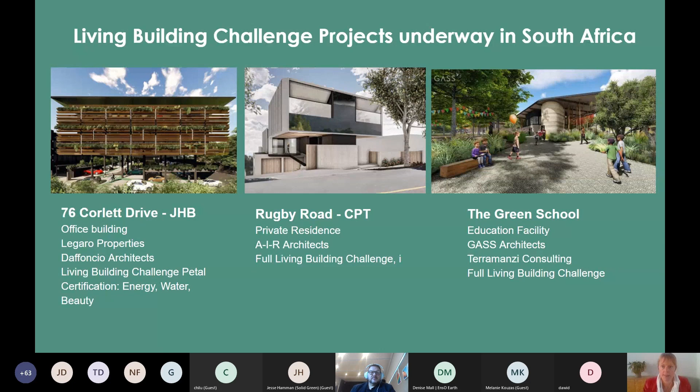Super exciting. As for the presenters: Denise is not going to present herself - I'm going to show you a video because she's got very bad internet connection where she is. That presentation is about net positive water and the projects we worked on with her. Chilu is then going to talk about net positive energy, and we'll get Fabio to talk about the school I just showed you. Lastly, Jesse will talk about materials and the materials petal. I'm going to hand over to Denise.

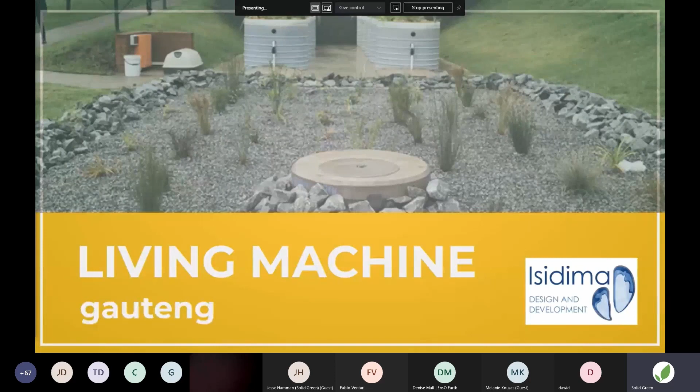Johnny, from Isidima, is the lead wet services consultant for the Corlett project. EnsO Earth tagged along, as we had been working together on the Living Machine project, and it seemed the natural next step to do the living building together.

However, transitioning an off-grid building into a municipal region brought an entirely new set of challenges. Municipal bylaws needed to be met in a way that would satisfy both council and the certification process for the Living Future Institute. True off-grid buildings are not permitted within a municipal region - all stands are required to have a potable water and wastewater connection, and a stormwater attenuation solution. As a direct result of Day Zero in Cape Town, the bylaws have been influenced, resulting in some grey area around harvesting rainwater and upcycling wastewater.

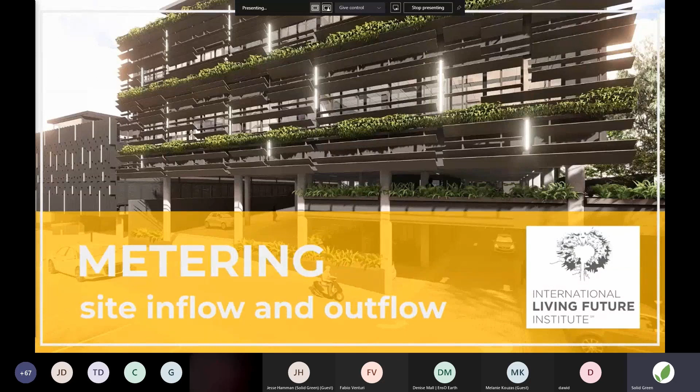ILFI, however, have restrictions that need to be met under these circumstances. The most important was a metering system on the inflow and outflow on the property, to record any incidents where the closed-loop design was infringed upon. But beyond that, it was a very standard closed-loop design, until COVID hit us, and everything changed.

Legaro made a strategic decision to pivot the building's functionality away from an office building towards medical suites. This was in response to the sudden drop in demand for office space due to remote working, and the increase in demand for medical facilities.

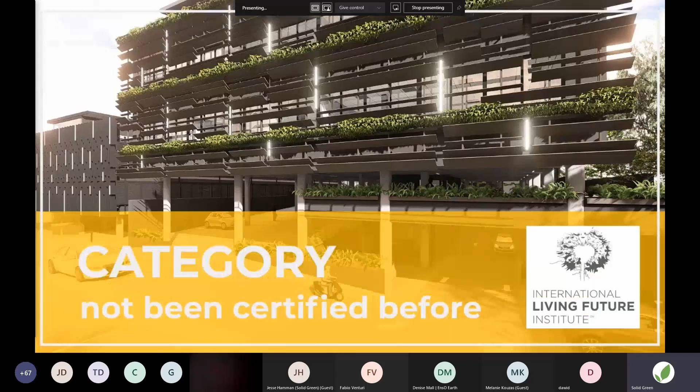Unbeknown to any of us, what this decision did was catapult them into further uncharted water, as the ILFI had never certified a building in this category for net positive water. Of the 600 globally certified buildings at the time, only 50 had been net positive water certified. Where we started with the first commercial building in Africa seeking net positive water certification, we were now designing the first medical facility in the world to seek certification for net positive water.

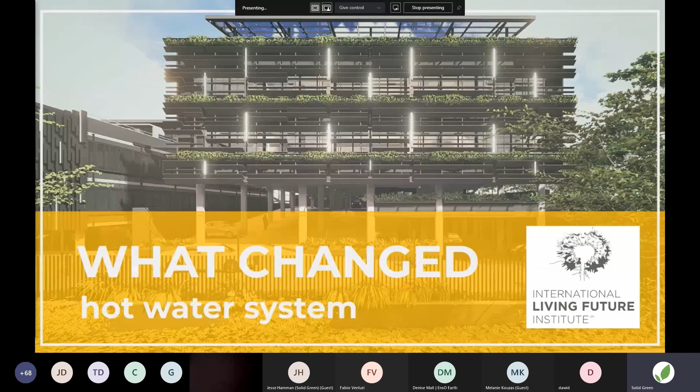What fundamentally changed was the pathway for certification relating to the hot water system. In conventional office buildings, the hot water was a secondary service, dealt with as part of the cold water system, with on-demand heating via a heat pump, or similar approved. In the medical facility, the hot water supply became the primary service, and needed to be available 24/7. Furthermore, we also needed to retain the minimum chlorine levels in the hot water system for health reasons, which in the conventional office facility were extracted from the cold water system at point of use. These were the two criteria that resulted in the formulation of the new pathway and building category.

The ILFI was supportive and held our hand through the process, and credit to their commitment to find the certification process that suits the client's needs as well.

The big question is always what is net zero and what is net positive. The difference is what allows us to move beyond sustainable to regenerative. Net zero occurs when the water consumed is the same as the amount of water that is recycled. And net positive is when the water recycled is greater than the water consumed. In this particular case, we are recycling 60 to 70% of the water on the site.

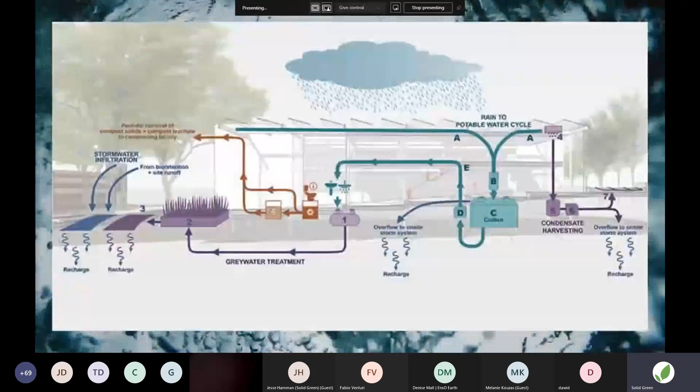So in summary, a net positive water strategy delivers an off-grid, ecologically balanced design that mimics a natural system while addressing water harvesting, wastewater treatment, and stormwater management, without disrupting the natural water cycle of the site.

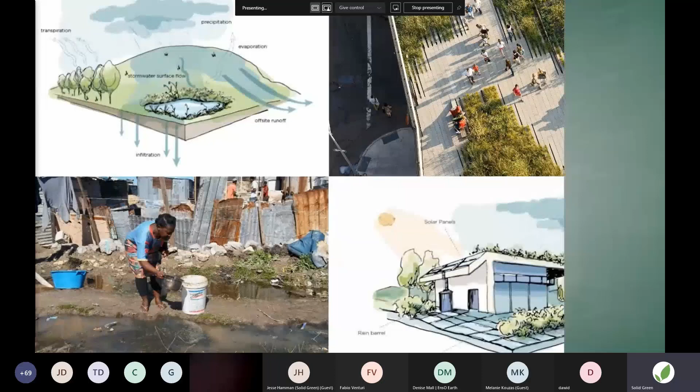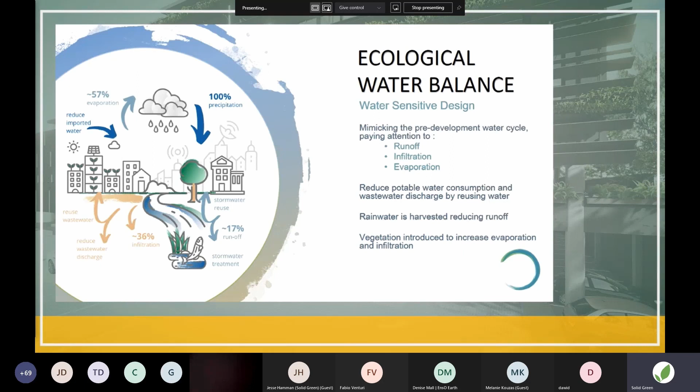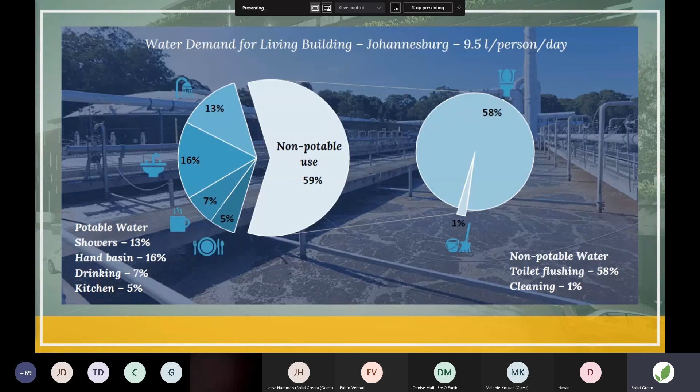So how do we create an ecological water balance? First, we have to aim for the targets that have been set by the pre-development conditions, paying attention to runoff, infiltration and evaporation. Only by rationalizing the water demand as fit for purpose can we create an optimal water balance for a project. We then look at the wastewater system to reuse, reclaim and recycle as much as possible, in order to avoid the double-dipping cost of using potable water for toilet flushing. And lastly, we look at stormwater management, but this is integrated with rainwater harvesting for potable use.

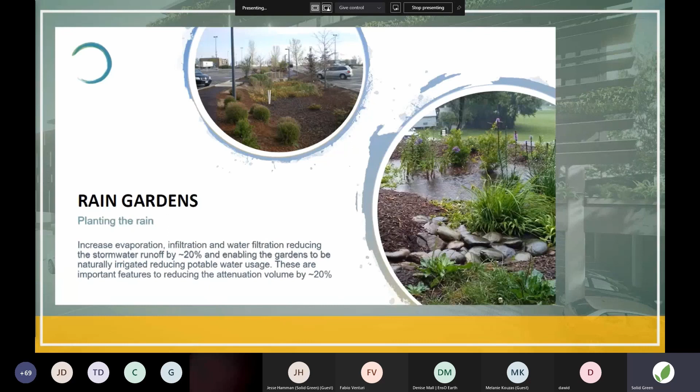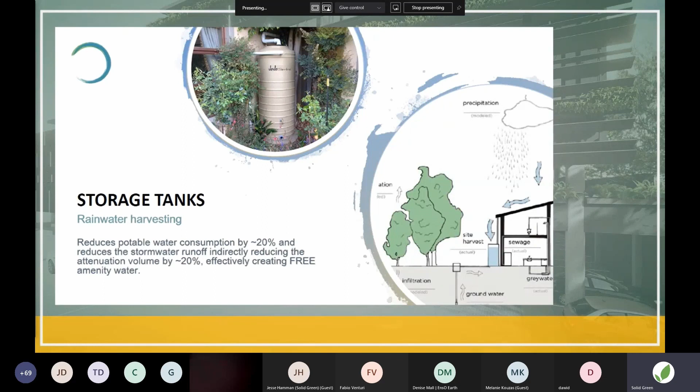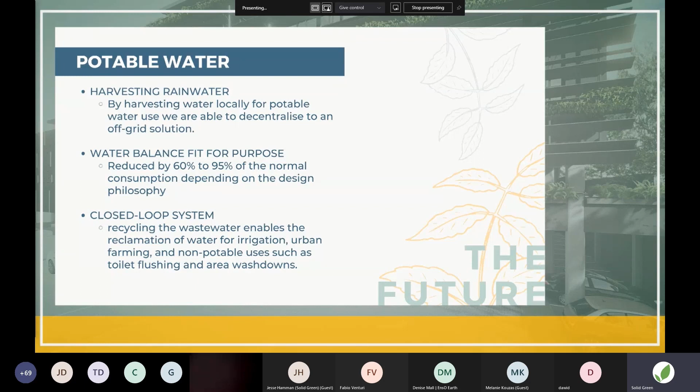Rainwater is one of our purest forms of potable water, requiring the least amount of effort to purify, and is not allowed to be used for toilet flushing in the living building. It should be used exclusively for potable water. It is by harvesting water locally for potable water use that we are able to decentralize to an off-grid solution, which is really the solution that economic water-scarce Africa really needs. The potable water demand can be reduced by 60% to 95% of the normal consumption depending on the design philosophy, with water usage further reduced by incorporating water-efficient devices such as composting toilets, waterless urinals, and hand basin sprayers.

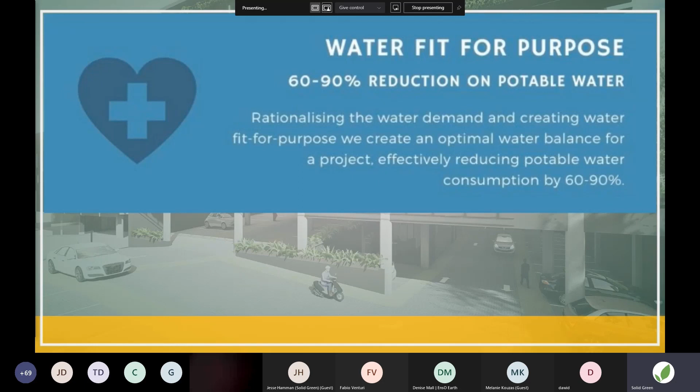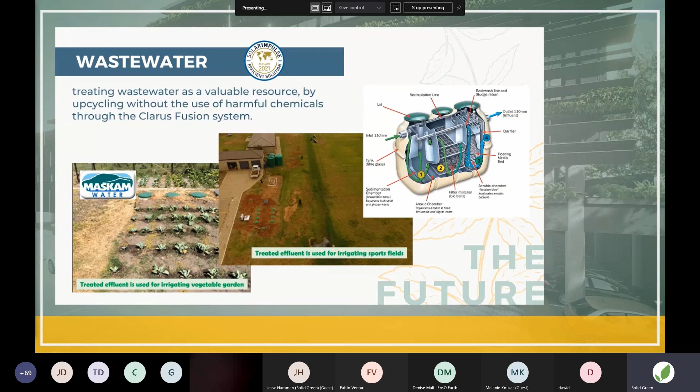Then we look at the wastewater system. We need to change our lens here and see wastewater as a valuable resource. By upcycling the nutrient-rich wastewater, we are able to use the reclaimed water for irrigation and urban farming, as well as for non-potable uses such as toilet flushing and area washdowns. A biotreatment system is really the heartbeat of the wastewater reclamation system, as it mimics nature's purification process without the use of harmful chemicals.

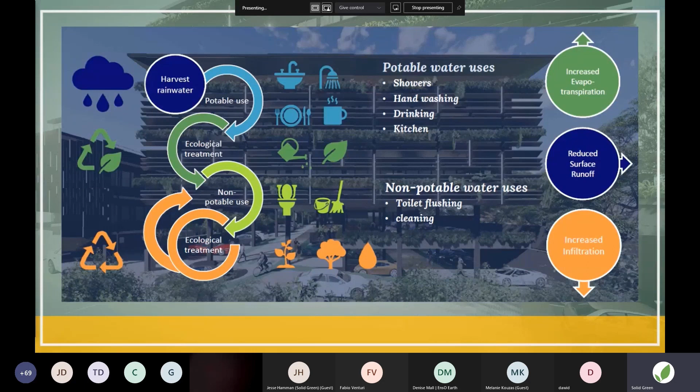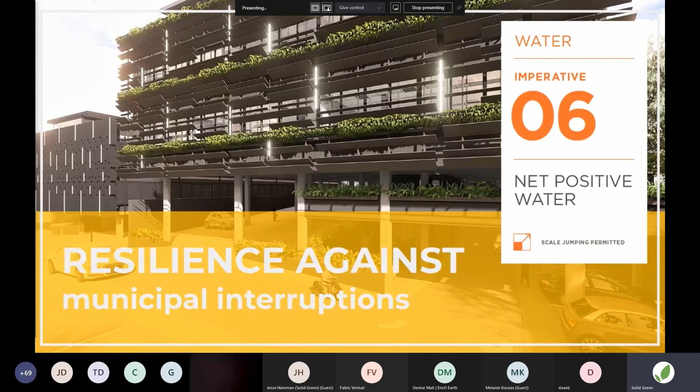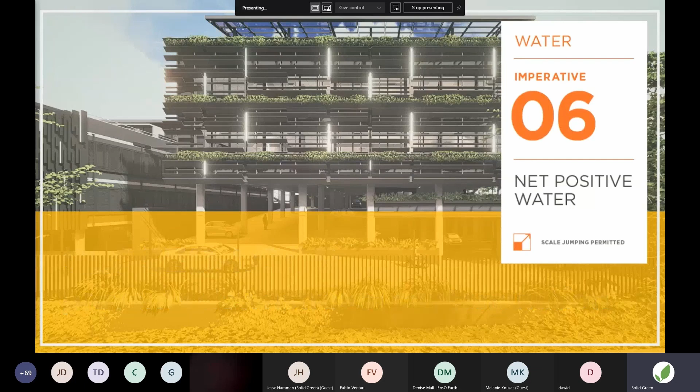What is the value add from adopting net positive water strategies? It improves the resilience of development against municipal supply interruptions, which indirectly will contribute to higher productivity rates for tenants. It relieves the stress on municipal services, indirectly increasing the capacity of the municipal system while also reducing local and catchment flooding risk. We enable a positive environmental impact by restoring the natural hydrological conditions. Harvested rainwater is free from micropollutants and pharmaceutical products commonly found in municipal water harvested from surface water. And by adopting a closed-loop wastewater reclamation system, we also prevent all of the above from entering and contaminating our water resources. The design we implemented also incorporated the option for seamless municipal backup, further increasing resilience of the system.

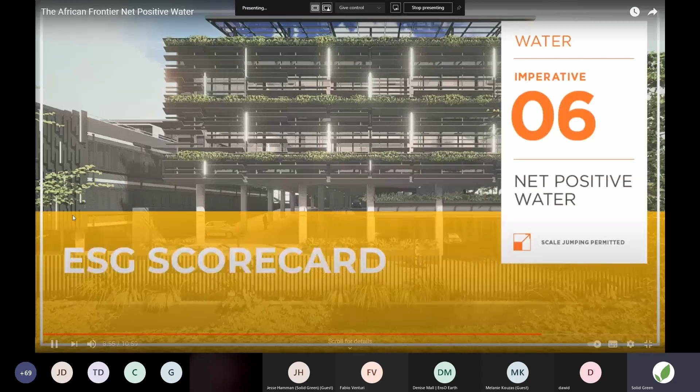The time of being able to ignore your corporate social responsibilities are over. As we move forward out of the global impact of COVID, we are seeing the impact of ESG on companies' investment value. It is now more relevant than ever before.

We are currently refining the business case as more accurate costings emerge as we move forward into the construction phase.

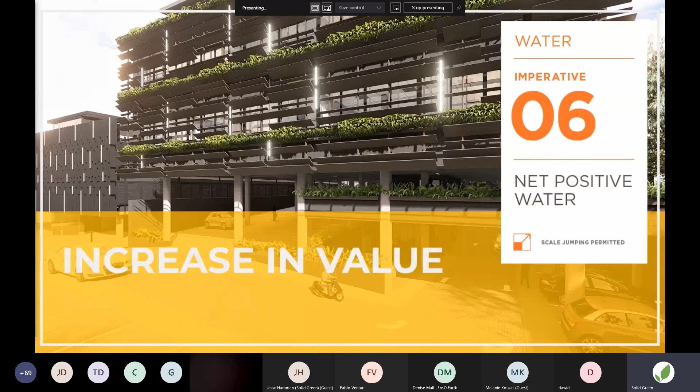Some key assumptions are that net positive water will result in higher rental and occupancy rates, especially as water scarcity becomes the new load shedding in South Africa. Accredited developments will increase in value at higher rates than the market average, with conventional buildings currently performing at 7% and their green counterparts at 10%.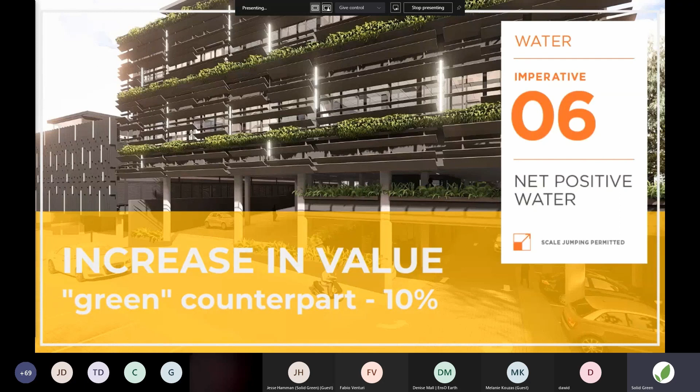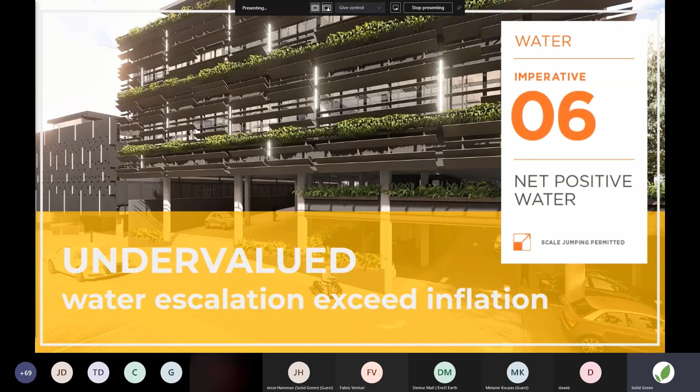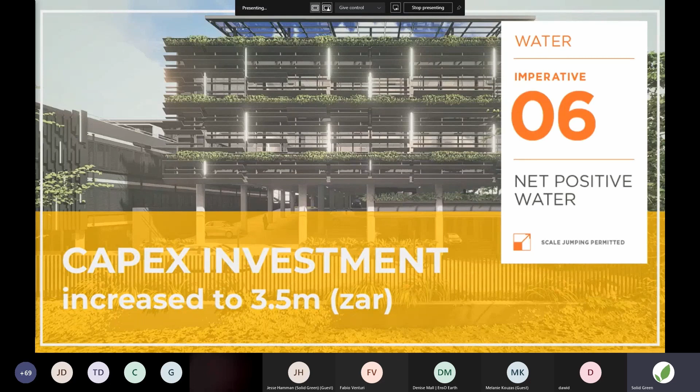Municipalities will still require service connection fees to be paid even where consumption is zero. Municipal supply costs will escalate at a constant rate, even though we know that water remains undervalued and that escalation will exceed inflation. While we have a notable increase in capex in the vicinity of about 3.5 million, we have a dramatic reduction in OPEX from 120,000 to 40,000 annually.

So given all the above factors, we are still anticipating a return on investment in the vicinity of 12.5%.

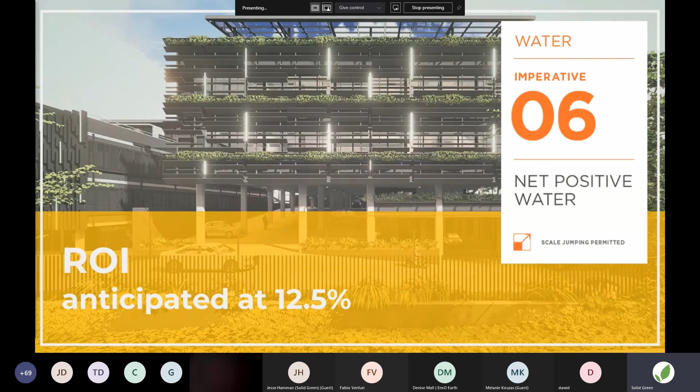What does this mean for the African frontier going forward? How can we scale this to include a living community challenge in the near future?

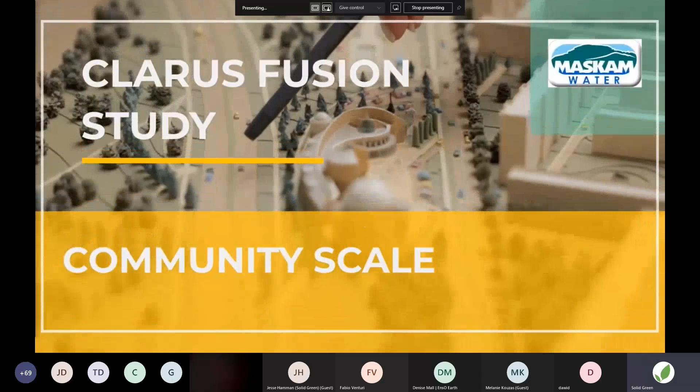We are currently working with Maskam Water to further develop this business case with regards to the Clarus Fusion biotreatment system, with a single dwelling installed cost in the vicinity of 200,000 versus 40,000 per individual dwelling in a cluster of 80 homes. So please contact us if you want to help push the frontier forward.

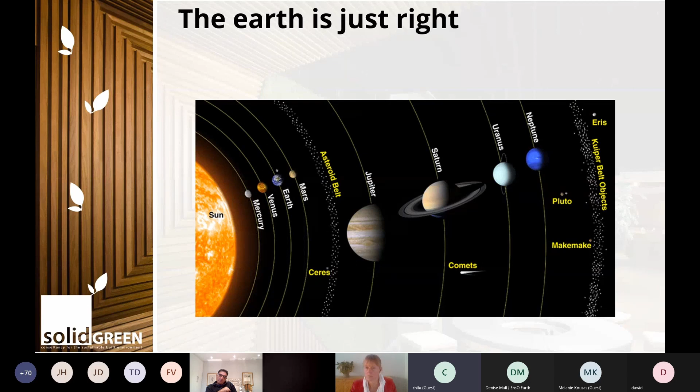When we're trying to consider new ways of approaching buildings to achieve these challenging goals, we have to build buildings that do just enough for what they need to do. Tools like the Living Building Challenge, net zero or zero energy certification can help guide this, but they won't give you all the answers because, as mentioned, these are about performance. In the end, it's agreeing on a particular outcome and making sure you get there. And what happens when we don't design for nature is quite simply carbon.

In South Africa, we burn a lot of fossil fuels to power our lives and our buildings. So this is the cause and effect: when we don't design for nature, we end up harming, or even at the current pace, destroying nature.

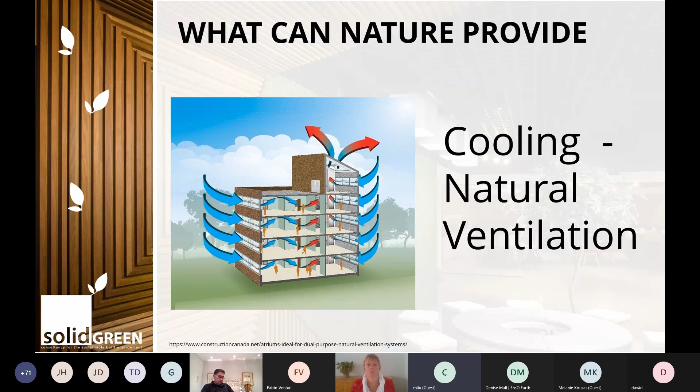And then the other aspect that nature can provide is warmth. Johannesburg is a great example - even though we have famously cold winters, we have sunshine in winter most of the time. So during the day, there's a source of heat, and these are things people intrinsically know. If you're looking at a house or building and they say it's great because it's north facing, it's because nature can also provide warmth. You have to always find a balance between providing that warmth in winter versus what you'd need in summer.

So is anyone doing it? Madu mentioned a couple of buildings already in Johannesburg. I put one in there, which is our Solid Green office. Technically we're not yet net positive because we don't have a connection to the grid—even though we've got excess energy, we just can't give it to anyone yet. But we've had interesting experiences trying to have a building that is more natural. In winter, we rearranged all the desks to be along the glass, because that's where the sun is, and that worked quite well as long as the day has some sunshine.

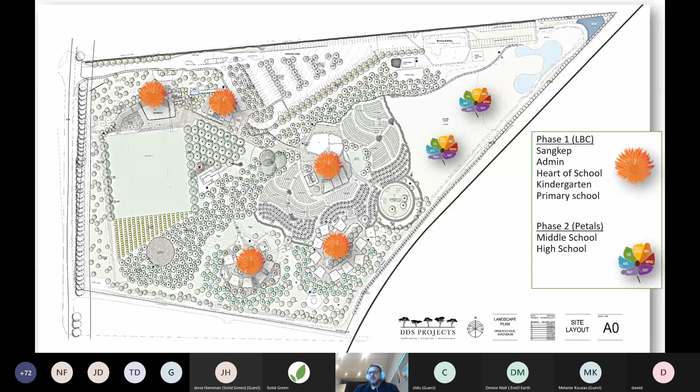Enter the Living Building Challenge, which is simply the most rigorous certification system on the planet, and it really resonated with the ethos of the Green School brand. So we were tasked with the certification of 5 clusters of LBC projects—full living building, and 2 petal clusters. Each of those clusters is actually a number of buildings, but we grouped them up and are running those concurrently.

As Malu explained previously, there's a total of 7 categories and 20 imperatives. All 20 are mandatory, and achievement can only be based on performance—it must be running for at least 12 consecutive months, and you cannot model that. So we had found the class of certification system which would challenge and inspire and create a living and breathing school.

So we'll be focusing this experience share on 2 key themes, which really created the most interaction, challenge, and reward for the client and the professional team.

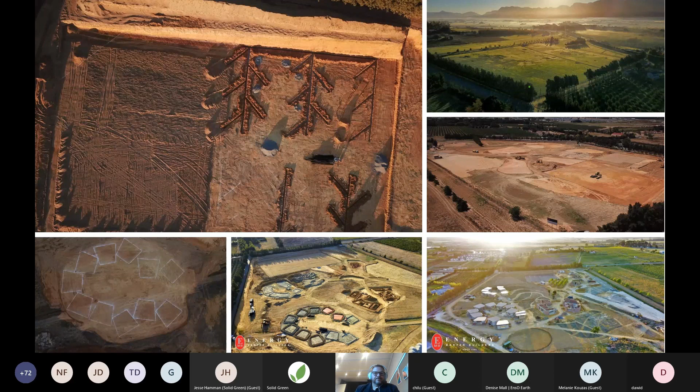So I've shared some beautiful images of the project at various stages of construction. This is a rapid introduction to biophilic design—a human connection to nature. This is one of the themes we're going to speak about. For those not familiar with biophilic design, it's about direct experiences of nature: direct, indirect, and experiences of space and place.

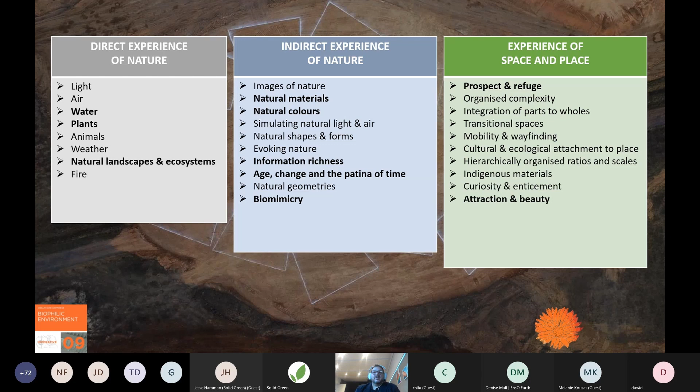So direct experiences such as light and air wash across our senses. Water plays with our acoustic, visual, and olfactory senses. Our interactions with plants, animals, and weather also play a part. There's also indirect experiences—primarily a connection to nature: natural materials, colors, shapes, forms, and then a sense of space and place, so sentient beings find anchors in those spaces and places.

Biophilic design allowed the entire professional team to think freely and bring their unique interpretation of living, feeling, and experiential creative into the hard design of the project. This involved cumulatively 8 hours, which is what LBC requires - a workshop with the professional team where you ask the architect, the engineer, and everybody to throw their titles out the window and just be human for the day, feeling their way through the design.

It's a wonderful exercise as you move through those direct, indirect, and space and place categories to bring out almost childlike experiences of nature and design. In this particular instance, we're showing water. The attraction to water is often most pleasing and perceived as clean, in motion, and experienced through multiple senses - sight, sound, touch, taste, and movement.

Together with the design team, we integrated these characteristics into the campus, using things like water furrows, waterfalls. It's also integrated into the landscaping as wetlands and rain chains, so it evokes the full set of sensory experiences on site.

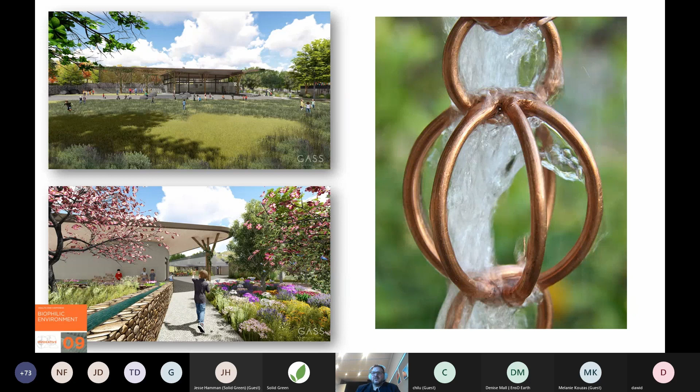From the tree-like patterns found on the columns of those pergolas, the shapes of building facades, to seed pod, macro and micro structures, and integrating parts to whole - natural shapes and forms, all bioclimatically designed - these are found throughout the project. Just drawing attention to the natural form at the top there, the pomegranate seeds - those clusters of classrooms have got a unique space connected to a whole without intruding into each other, and they have a central shared space. Some really interesting design features.

When you put an architect, a fire engineer, and a structural or facade engineer into the same conversation, it's bound to create some sparkling engagement. We certainly had a lot of that. The main challenges with this imperative were addressed by focusing the team on an outcomes-based approach to achieve the design intent.

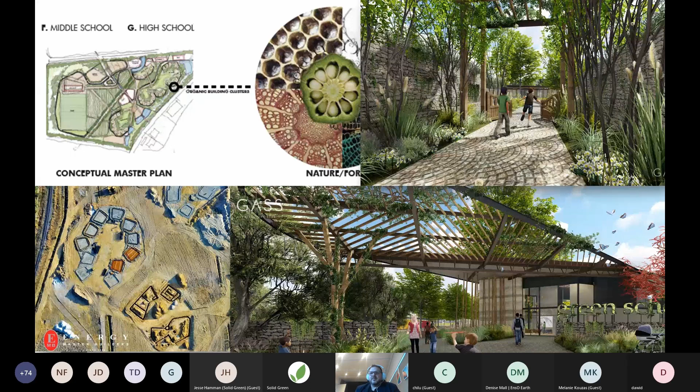Materials was particularly challenging. I'm not going to go into too much detail here, but in a South African context it was a big challenge. We put a lot of focused effort into transforming and influencing the South African market with regards to the suppliers and the types of materials we worked with.

Dekro Paints, for example, developed a red list compliant blackboard paint, which was a South African first. It goes beyond the blackboard paint though - it's a really nice story, a story of hope and inspiration. For each and every child, teacher, and parent that scribes onto those boards, there's a story behind that.

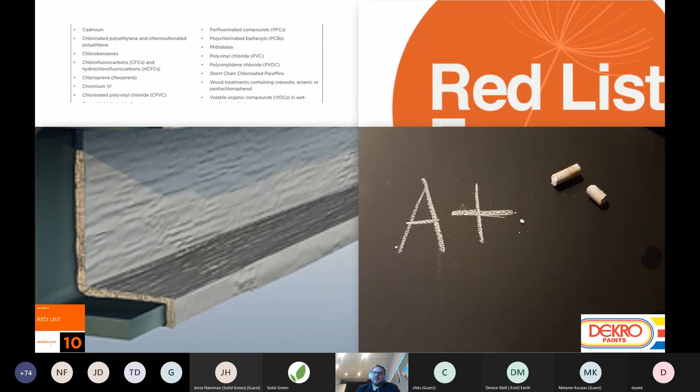There were reams and reams of spreadsheets to keep track of all the various materials, which we had to audit prior to them being ordered on site. Once they got onto site, we had to audit them as well.

Carbon was also quite an exciting aspect to look at. OneClick, which is a software program, allowed us to balance decisions which are vital to the project's budget, timeframes, supporting the local economy, and environmental impacts.

One of the major challenges with OneClick LCA was it was not contextualized to a South African context initially, but we managed to get them to revise their database, which also really helped with work that we did thereafter - part of our influence story. The principles used were simple: just as Chilufya said on keeping things simple - source local, reuse, and reduce building materials.

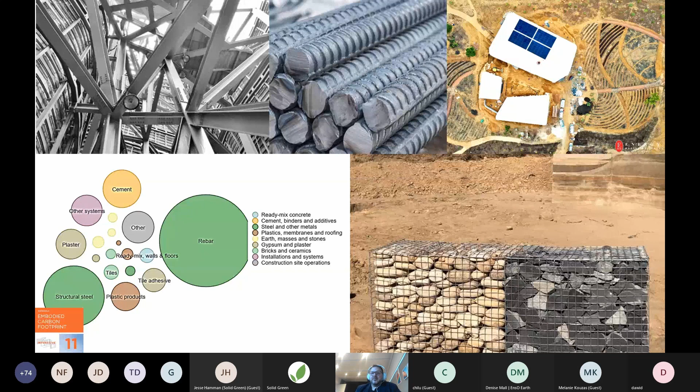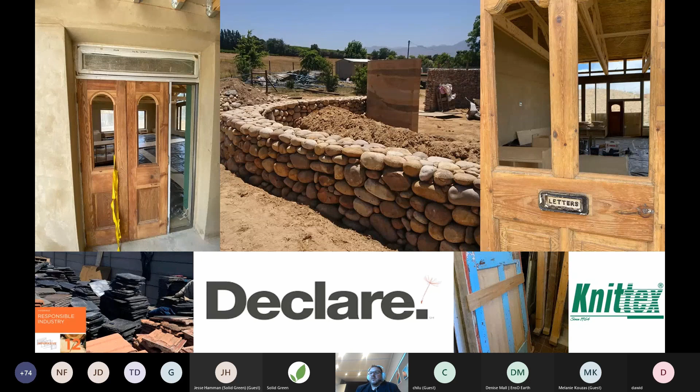Declare, which is a transparency platform, also provides consumers with honest information for product selection. Knittex, who produce shade cloth and supplied the school throughout, are aiming to be a South African Declare product - they're busy going through that process. The major challenge on this really has been transparency of the ingredient lists with manufacturers. They really do run wild and free. That was a big challenge on the project.

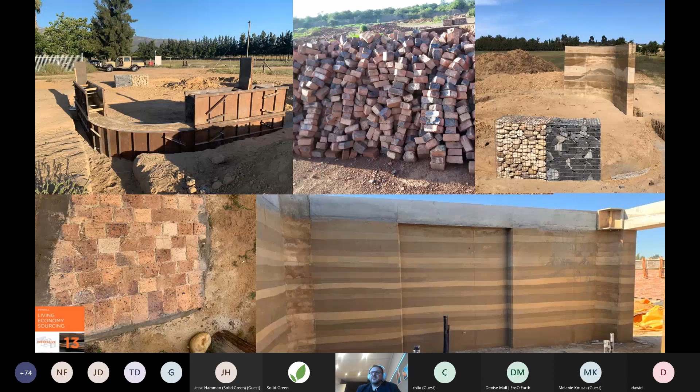This imperative turned out to be an incredibly rewarding journey. We embraced local fully - we excavated sand, rock, and clay from the foundations and adjacent farming areas. Excess materials were used but incorporated into structural and design aspects. We also included the reuse of half bricks from a conveniently placed nearby brick factory, so there was a significant amount of upcycling that took place.

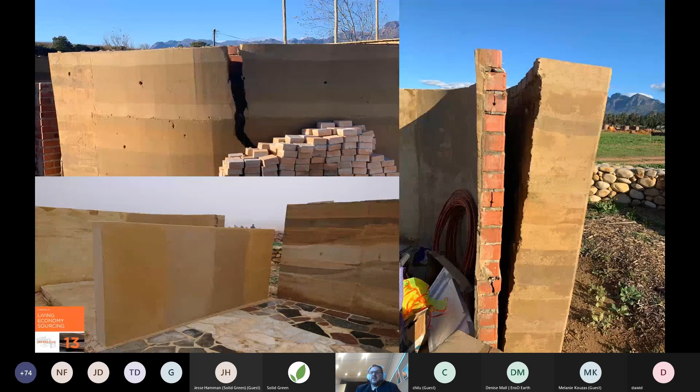There was also a significant amount of testing on site to ensure structural integrity, color blending, and texture correctness. It was a lot of fun and allowed for some excellent engineering - it was a learning curve for everybody on site.

We excelled at salvage with a tenfold improvement on the LBC requirements. We used salvage doors, which also spoke to the aesthetic design and a specific imperative that speaks to the patina of time, where one can see the aging of various materials and aspects of the design. Composting also takes place on site at every opportunity, and we've mentioned the recycled bricks already.

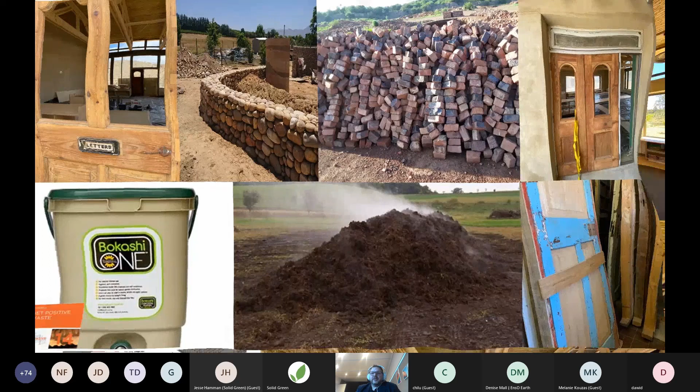The transformation of materials from nature frequently elicits positive visual and tactile responses, which few artificial materials can duplicate. So the use of bright colors that emphasize environmental forms, like flowers, sunsets, sunups, and rainbows, were used and applied very specifically. This is a sneak peek into some of the classroom spaces, where a significant amount of natural material was used to anchor the surroundings, and those specific bright colors were used in the forms that were required.

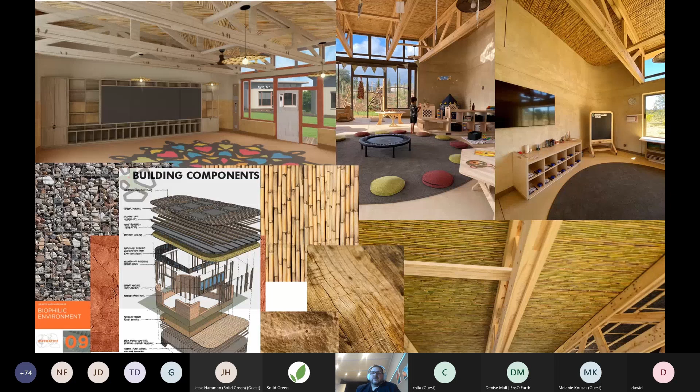None of this would have been possible without Alba, who's a dreamer and a planet shaper, one of the most incredible clients that we worked with. Alba and her family loved the experience of Green School Bali so much that she decided that Africa needed one. So she built one herself.

That was then, and this is now. Green School opened in February 2021. It's aiming to be the greenest school in the world, and they're just finishing up with the last of the clusters at this point in time. They should be wrapping up shortly, within the next 2-3 months.

These are some really great references. Green School's website has a video there as well. Please check out John's TED Talk, really, really inspirational in his famous Kikoi, and he's quite eccentric. And yeah, I think that's us, and just leave you with that thought about shaping minds. Thank you very much.

Thanks, Fabio. That was awesome to see where the project is, and I'm really happy to see that the school is up and running. That's super exciting. I also know that one of the imperatives of the Living Building Challenge is that you're going to have open days, so please keep us up to date when those open days are, so that we can share that with our collaborative community. Cool. We're going to go through to the last presentation.

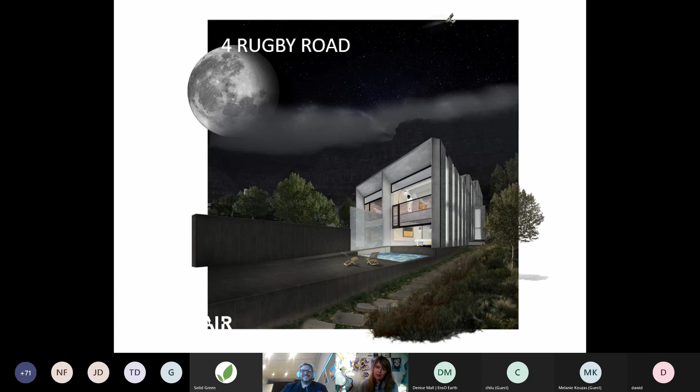But we have managed to put a database together of materials to date, and of all the basic green building principles in the Living Building Challenge, energy, materials, and water are the most difficult and challenging to work with, as you guys have heard from Fabio. As part of the updated Living Building Challenge version 4.0, the embodied energy carbon footprint is included in the energy petal, so we are looking to upgrade our rating to version 4.0.

The material strategy for the Rugby Road project was to ensure that non-toxic, ecologically restorative and transparent materials were selected in the build. The whole point of this is to stimulate the local building materials product market and advocate for that market. So we're looking to upgrade the materials petal to version 4.0 for ease of implementation.

Looking at the imperatives under the energy petal, it's required that we reduce CO2 equivalent embodied carbon by 20%. To achieve this, we need to make sure we have a baseline model for embodied carbon, and we need to use a calculator to do that. In our case, we looked at eTool LCD, which is a free tool, and now One-Click LCA also has a free tool to use.

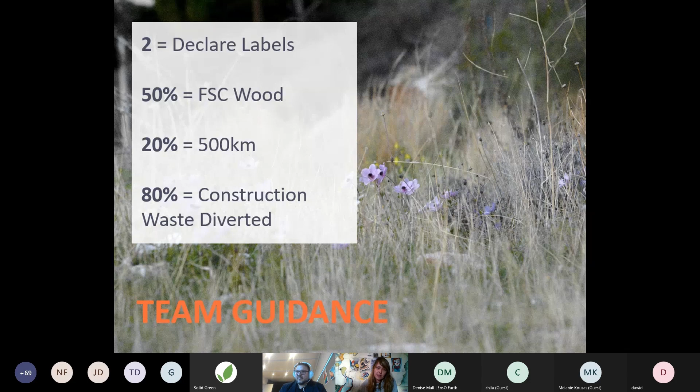And so the red list. The intent of the red list imperative is to foster transparency and to make sure that toxins and harmful chemicals are removed from the build through the lifespan. As part of the version 4.0 tool, as we mentioned, there has been a reduction. So it's no longer 100% compliance, it's 90% compliance by cost. So that's a benefit to work with.

And toxic chemicals like PVC, added formaldehyde, wet applied VOCs, added lead and mercury, to name a few, are components that are not allowed on the project at all.

So to ensure that our products on the project comply, we prepared a vetting spreadsheet. We made sure all of the specifications were included, that came from all of the engineers and the architect. We sent out a questionnaire to every single supplier to confirm the environmental product declaration, the willingness of them to disclose their chemical content and mixes, which sometimes is quite difficult to do, and wherever possible to convince the suppliers to get a declare label to transform our local market. This process does take a lot of time, as you can imagine.

And the greatest barrier I've been facing is market availability, in particular the industry standard of PVC that's included a lot in buildings, and the electrical fixtures and fittings that are standard built. So finding locally manufactured red list free insulation and PV panels that conform to all the requirements of thermal and energy efficiency is also quite a challenging process that we've worked with.